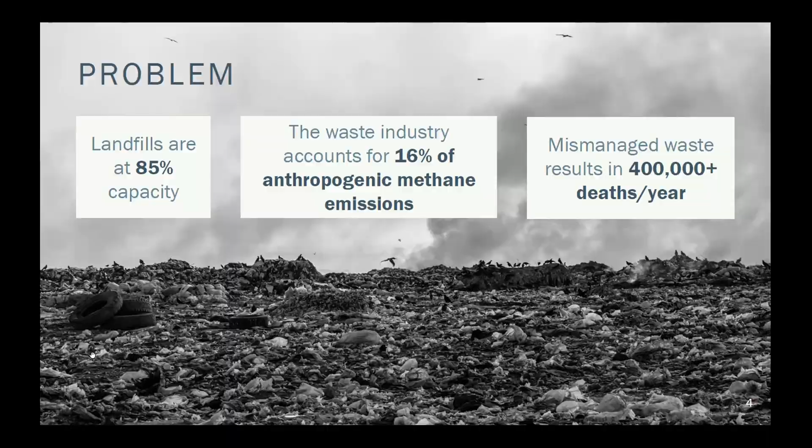So after taking the course in permaculture design and learning about fungi, I thought, why not try to apply it in an industrial waste stream like construction and demolition waste, which is also comprised of heavy hydrocarbons. So presenting the natural ecosystem that fungi would enjoy.

We're using the mycelium, the root structure of the fungi. They're natural cleaners of our earth, and they've been doing it for centuries without our help. But they're also natural builders, because the chitin that makes up the cell wall of the fungi is a naturally occurring material, and those materials are water and flame resistant, insulative, and lightweight. So it's the duality of using a nature-based solution that makes our process very efficient.

Next slide. In addition to what happens in nature and what we've seen in industry, we know there's a huge body of work around mycoremediation as a form of bioremediation across multiple chemical streams and multiple waste streams.

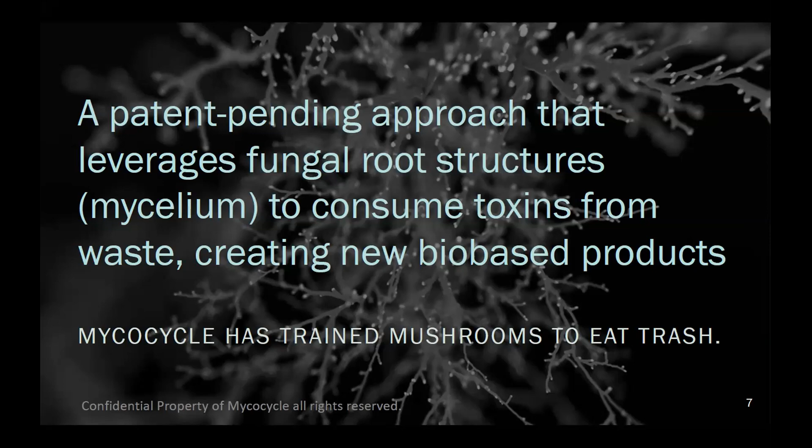So I'll tell you a little bit about how we do it. Next slide. At a very high level, we do a three-step process.

We develop all the fungal inoculant in our lab using a solid state fermentation practice, generally growing it across some type of agricultural input, which can also be a waste stream, to create our treatment. We then take that out into the field.

So we're working in situ. We could do it ex situ, or establish micro-processing sites too, where we are on the footprint of waste management. I'm really cognizant of transportation being a large part of the carbon issue, and so we want to work with a footprint that's already out there.

We take in size-reduced shingles, rubber, gypsum board, foam, polyurethanes, polypropylene textiles. We blend it in the second step with the materials and incubate it, so it sits for 4 weeks and processes in a controlled environment.

Fungi are just like us. They like to eat, drink, breathe, and be comfortable. They're most akin, by the way, to humans, of any organism on Earth. So just think about what we like, that's what they like.

At the end, we have a harvest, a MycoFIBER, MycoFILL, which is a new bio-based raw material that could go into the additive marketplace. We could actually manipulate the size of the materials and create things that could replace potentially calcium carbonate or magnesium hydroxide, going into fillers to not only replace things that we would mine that would have a high embodied carbon, but to also potentially improve the properties of the material they're going into.

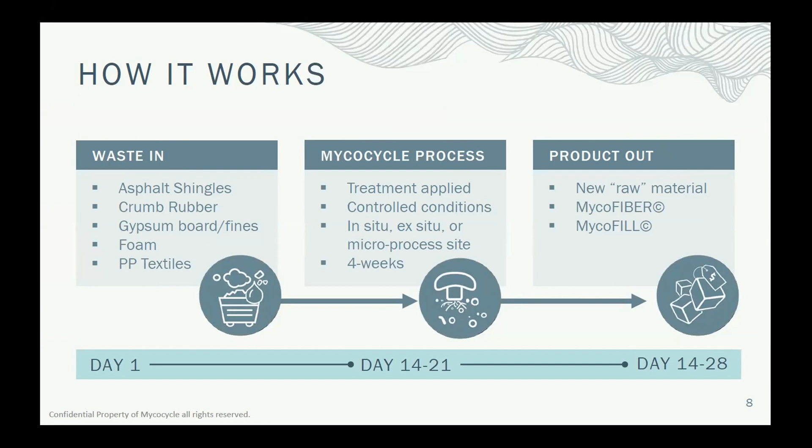So just a picture of what I described to you. Again, you see on the far left, the fungi, the entirety of that. We're used to seeing that mushroom cap. What we're really working with is the mycelium, which is that root structure below. We do lab cultivation, so steps 1, 2, and 3 happen in our lab.

Step 4 is out in the field, and this is blended, our treatment blended with gypsum drywall. This was a 4,000 pound paid pilot that we did out in the field.

Picture 5 is the field incubation. It's very passive. We did it in an intermodal container, climate controlled, spray foamed it. It was very low tech, and at the end of 30 days, you see this massive block. So if you compare from picture 4 to picture 6, this is what happens, and this is the outcome.

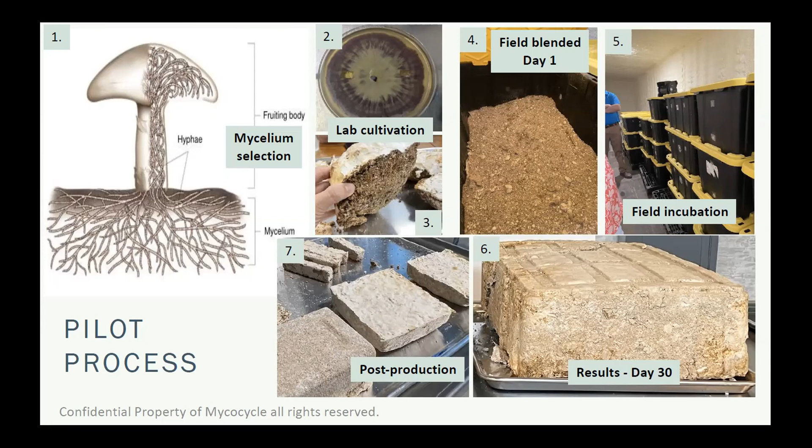Then we bring materials back to our lab where we can enter post-production or secondary incubation to meet the needs of manufacturers. Next slide.

So for obvious reasons, we see the benefit of driving circular supply chains and actually designing waste out of the supply chain within the built environment.

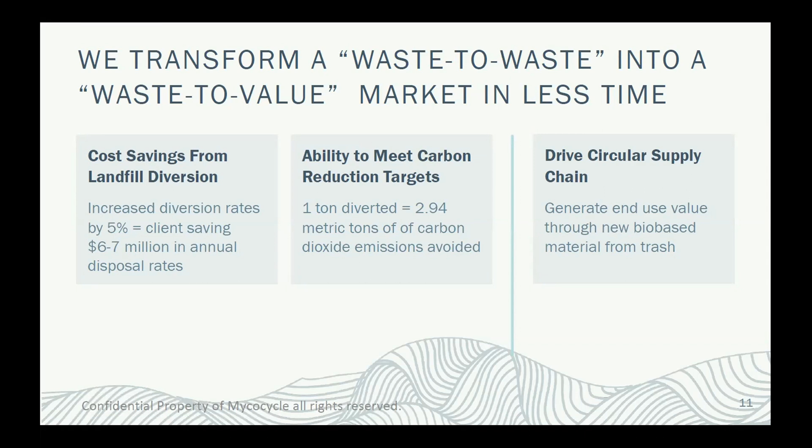We want to hit these metrics on both sides, impacting the carbon reduction on tons diverted, as well as looking at the embodied carbon of materials that impacts 11% CO2e in the built environment space. Next slide.

So to date, we've worked with multiple pilots in the field. We've scaled on over 10,000 pounds of materials since the beginning of the year across rubber, shingles, and gypsum. And we've had a very notable pilot with Lend-Lease on asphalt shingles from Fort Campbell Army Base. So we're getting very good and positive results across these really tough to tackle waste streams.

Next slide. What we see the opportunity to enter into is this bio-based raw material market from waste. So not only are we reducing the carbon to develop new materials or resource extract new material, we're harnessing it and using it for our needs.

Fungi like that, and so it gets stored in the materials, but this marketplace is already established. It's a $1.6 billion marketplace really focused on the consumer side. So we see consumer brands using it, but these are all of the areas that we see in the built environment side where there are opportunities to enter it in.

We're already seeing acoustic products in the market in Europe as well as flooring. And as opposed to some of the early entries into this through companies like Ecovative, where they were trying to create entire board stock materials, we're really looking at the additive market where we could start to make incremental steps to embody the carbon and reduce the entire carbon cycle through the supply chain.

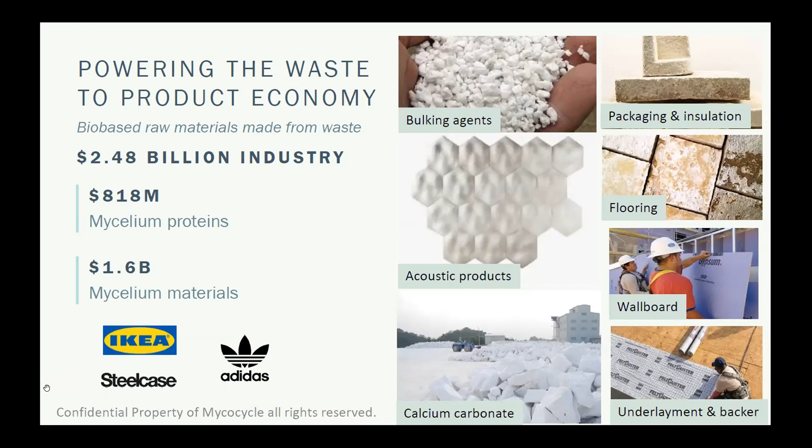So since we've started, we've gained a lot of support and recognition. I'm one of the 10 finalists for the Ray of Hope Prize through the Biomimicry Institute. We just wrapped up that cohort. Pay close attention to the folks coming through there. There are a lot of new materials that I think will be beneficial.

But what we're really looking for as we move forward are more pilot and product use opportunities, and that's the phase that we're in right now. So next slide.

I'm going to take you back to imagining a world without waste. There's no waste in nature. Nature has a tendency to take care of itself quite well, and we're the ones that usually disrupt her. So I think that it's very much kismet, if you will, that we're looking at nature to help solve our man-made issues. So I appreciate the opportunity to speak here.

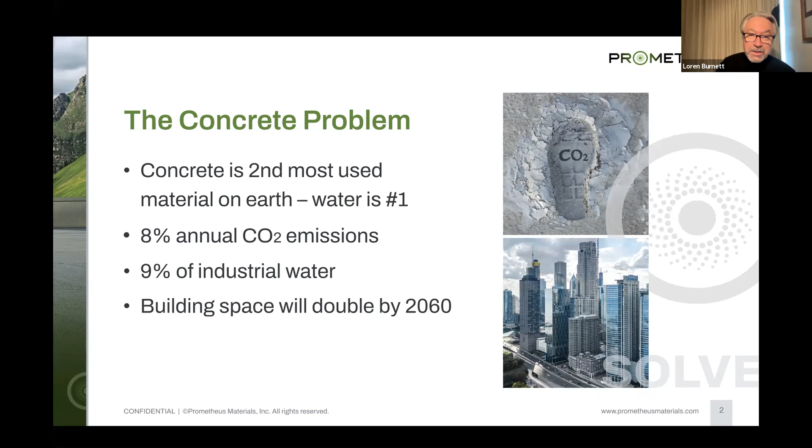But it's worse than that, because building stock is anticipated to double between now and 2060. I'm sure you've all heard this statistic, but it's the equivalent of building a new New York City every month for the next 37 years.

So our solution: we are producing an ultra low carbon alternative. We use microalgae and some other agents that we put into the mix, and we go through a process called biomineralization, which I'll talk about in a second. We then mix that with sand and water to create, in our case, bio-CMUs, concrete masonry units that are ultra low carbon.

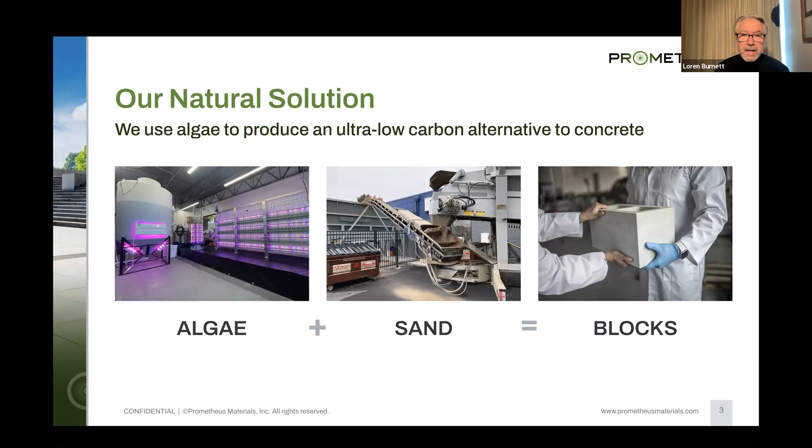Biomineralization is the key to what we do here. It's a process that nature uses all the time to build seashells and coral reefs. Basically, it's using natural processes, living materials, to create minerals, and in our case, calcium carbonate. So what we do is stimulate algae to biomineralize calcium carbonate on a commercially viable basis and time scale.

The technology started with the Department of Defense, DARPA, with 4 professors from the University of Colorado. DARPA wanted to see if there was a way to produce a hardened substance very similar to concrete, but they knew they couldn't fly it into the middle of, say, a desert — it's too heavy. They didn't want to truck it in over potentially hostile territory, so they wanted to see if they could use living materials to produce something in situ.

What the professors came up with is a process of using algae and biomineralization to create a substance very similar to concrete. With the success of that project, we formed the company back in March of 2021 with the 4 professors and myself.

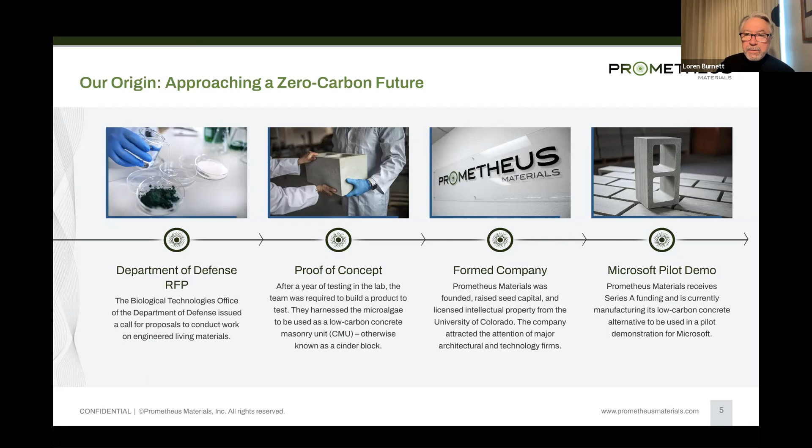We then completed a major pilot with Microsoft. Subsequent to that, we raised a Series A round of funding in March of 2022, and we began actually building a company around this technology.

Our partners in the Series A are pretty important to us because 3 of them are very focused on concrete in their businesses, and they all came to us wanting help to decarbonize the use of concrete and its downstream effects on CO2.

Microsoft's Climate Innovation Fund invested in us, and it's really the folks working with Microsoft who are building 50 to 100 data center campuses worldwide annually — so lots of concrete. GAF Roofing and their sister company BMI over in Europe together represent the largest roofing materials company in the world, with lots of concrete roofing, particularly in Europe right now.

And then Skidmore, Owings and Merrill, the architectural firm that designed the world's tallest building, the Burj Khalifa in Dubai, One World Trade Center in New York, and many others. All these companies know they are specifying the use of massive amounts of concrete and want to change the carbon footprint of what they're doing.

From a material perspective, what we have here is a very different material. The thermal conductivity of our CMUs relative to a Portland cement-based CMU shows a 90% difference in thermal conductivity, which is really exciting for us.

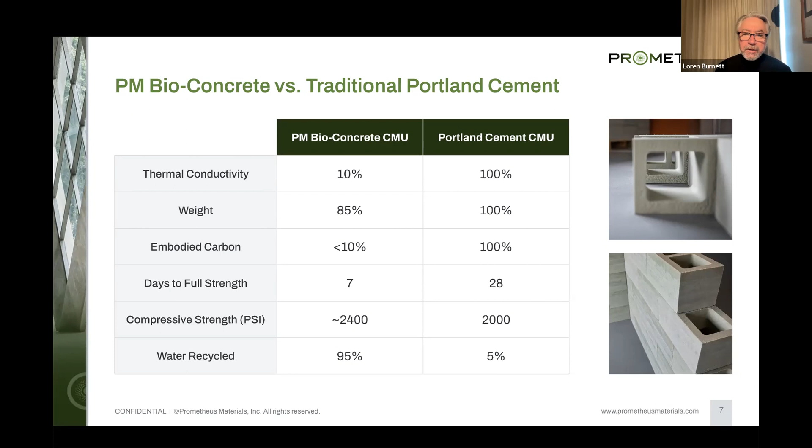From a compressive strength perspective, the ASTM minimum is 2000 for Portland cement-based CMUs. We're at about 2400 PSI for compressive strength. And actually, we've just done some internal testing on flexural strength, and we're at about 2,500 pounds per square inch on that, which is about an order of magnitude better than what you would see in normal concrete.

So our vision, our go-to-market product right now are bio CMUs. That's what we're doing right now. We're going through the ASTM testing process and certification process, which will be done this quarter. We believe that by the end of this quarter, we'll begin production of bio CMUs.

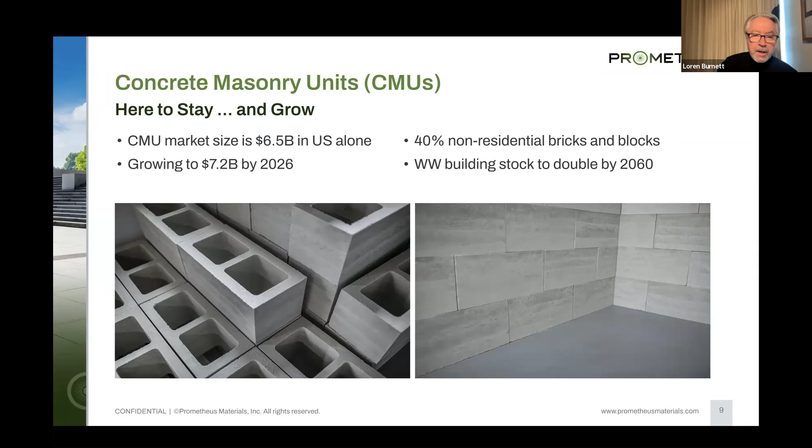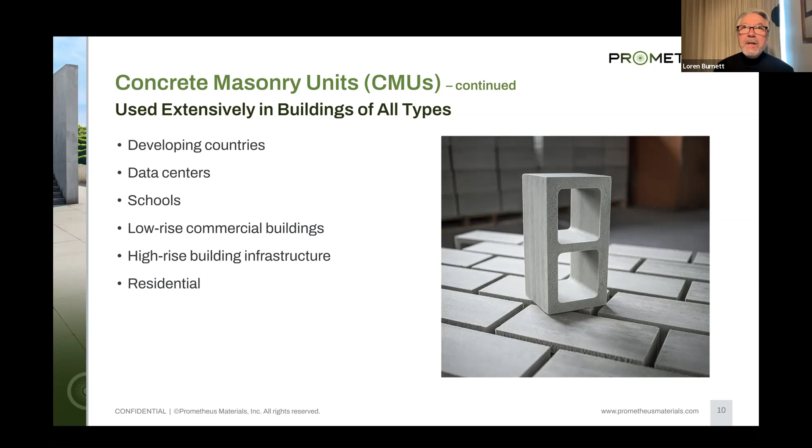Clearly, CMUs are a very significant building product throughout the world. There's hundreds of billions of CMUs made and used in building on an annual basis. And we've chosen CMUs based upon the fact that we can get to market very quickly with CMUs. We don't have to go through a 2-year testing process or something like that.

So our mission overall is to reduce carbon to the atmosphere by 1 gigaton per year. We're not going to do that by ourselves, and we're not going to do that next week or next year. But over time, we believe we have the technology to be able to do that.

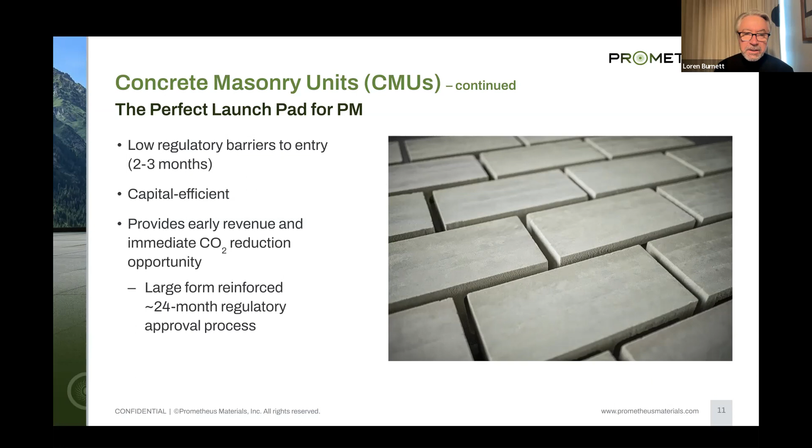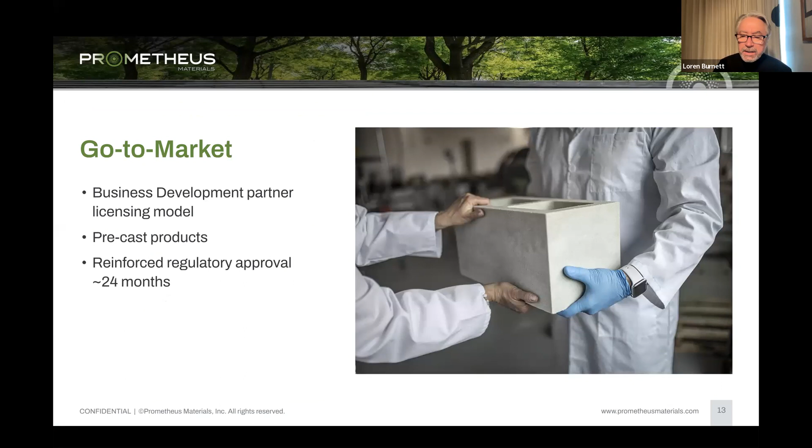Ultimately, we will begin to go through and go into other precast products, and then ultimately go into a ready mix concrete application downstream. Initially, we've already got ASTM sign off on non-load bearing CMUs, and we will be going through the testing process to get certified for load bearing CMUs again by the end of the quarter here.

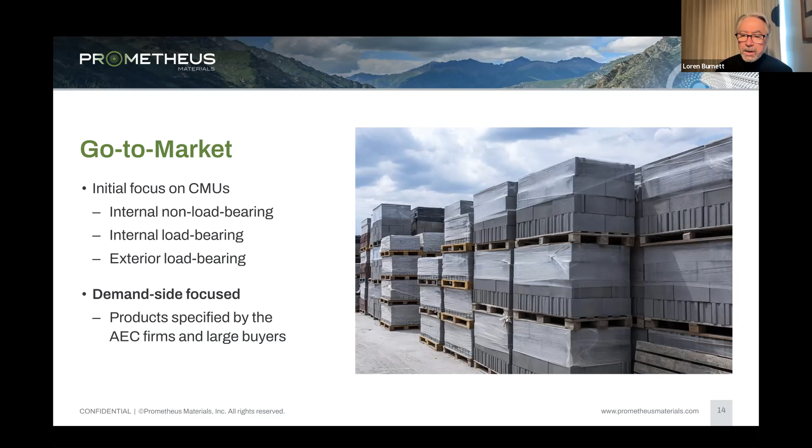Our focus also, contrary to other companies that are trying to reduce carbon in concrete, who generally focus on the supply side, working with concrete manufacturers, we take a very different approach. We work on the demand side. So we're focused on clients that specify, like Microsoft, like SOM, the use of large quantities of concrete building materials.

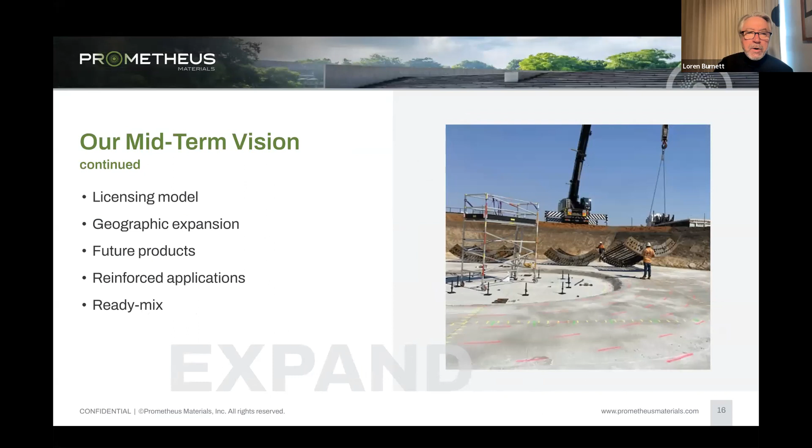And again, then moving on to precast applications, and ultimately we'll be going into a ready mix application as well. Our process overall is to license our technology. We're producing right now, or we will be, but the future is really licensing our technology to cement and concrete manufacturers worldwide, as well as manufacturers of concrete products. And then again, 1 gigaton a year.

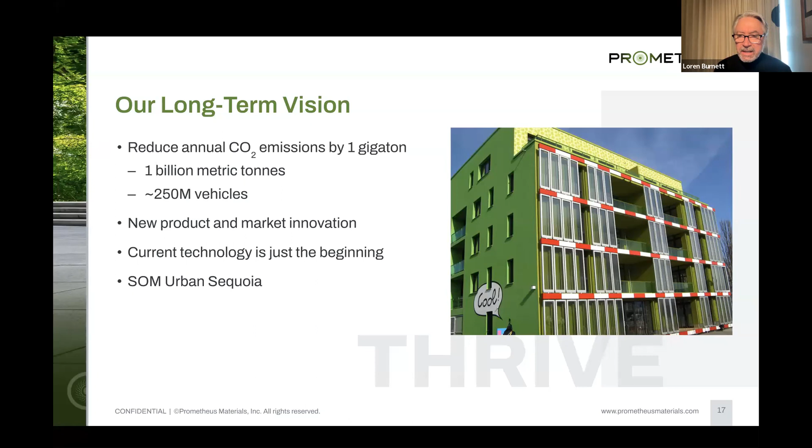I would encourage all of you to take a look at SOM's website and go into Urban Sequoia. It's fascinating what they plan to do with buildings, and they look at Prometheus Materials as a key component of their Urban Sequoia strategy. Lots of press over the last several months. This area is hot and getting hotter, and we're very excited about our opportunity to work with companies, as well as folks like yourselves, to reduce embodied carbon.

So thank you very much.

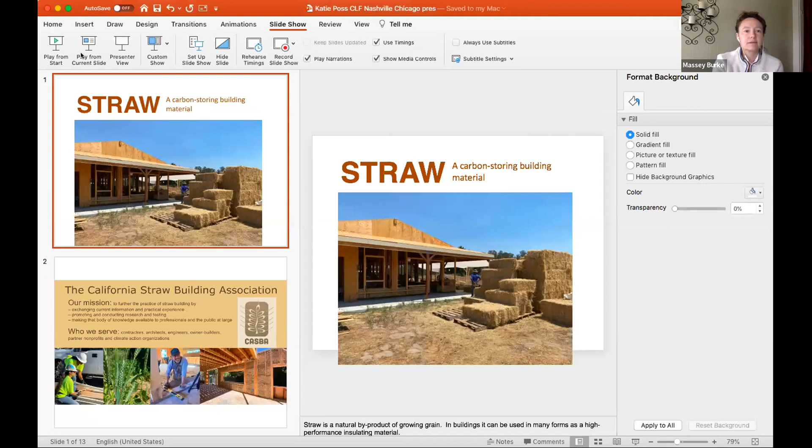Hi, everyone. My name is Massey Burke, and I'm the co-director of the California Straw Building Association. And I'm going to talk a bit about not a product, but a community.

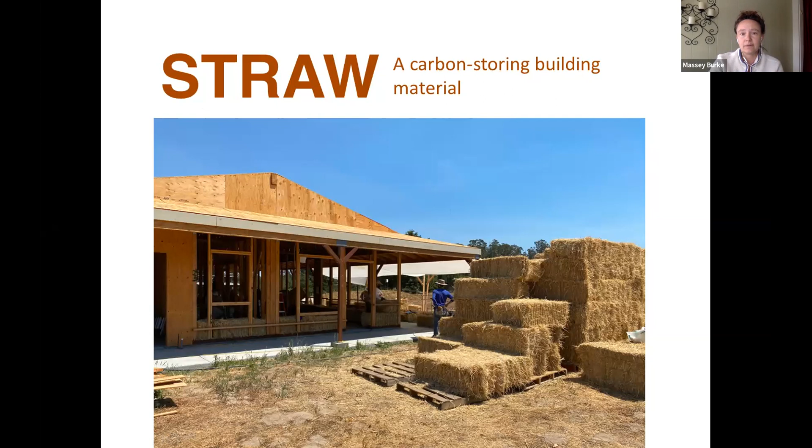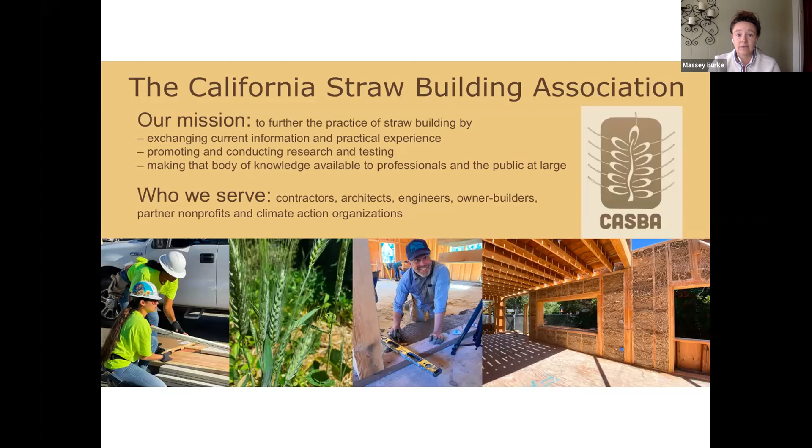So building with straw is what I would currently call an open source, mostly a nonprofit building community made up of, I'll keep going, here we go, California Straw Building Association, a trade organization, nonprofits, made up of architects, engineers, contractors, DIY, all practicing and helping to scale various ways to use straw as a building material.

Some of the stuff we're working on right now: working on an LCA for straw. These exist, there are a couple of European ones. We don't currently have an American LCA for straw, and then straw-based products, which I'll talk more about in a minute. Working on scaling up the workforce skills for building with straw and other natural materials.

Working on supply chains, also looking at land management and supply chains and what impact that has. Working on code and testing. California Straw Building Association was responsible for writing the international straw building code that currently exists in the residential code, and we do ongoing code work in various ways. Professional education, more training resources, online trainings, and working on issues like insurance, helping other parts of the sector become familiar with and comfortable with straw as a building material.

Okay, so straw anatomy 101. This is something you're probably familiar with, but straw is the stalk of one of the most common grain-growing grasses, cereal producing grasses. So typically in California we build a lot with rice straw, but you can build with wheat straw, oat straw, or barley straw. What's important is that straw is what's left over when you harvest the seed off the top of the plant.

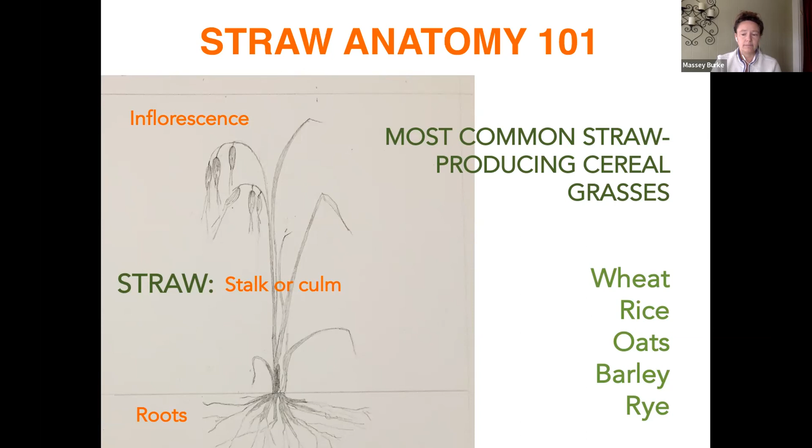Couple notes on sourcing and growing straw. We currently talk about straw as a byproduct or waste product. I'm taking a both-and approach to thinking about straw supply chains right now, but as you're probably aware, land management processes are becoming more and more important when considering the carbon footprint of building materials. So one thing I like to work on is thinking ahead about how to support climate-smart or regenerative land management processes as much as possible.

One reason we have a lot of straw available right now is that straw-producing plants are grown as a monoculture, which means it can be hard for that cropland to reabsorb all of the straw into the soil in the planting cycles typically used. So especially with rice in California, but also large-scale wheat growing and other crops, you just have a lot of leftover straw stalks, a lot of which gets used for animal bedding or erosion control, but there's still a good bit left over from that.

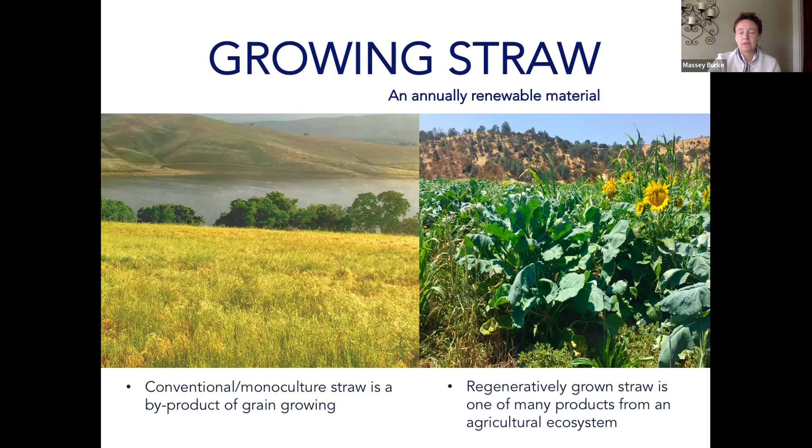In a more climate-smart or regenerative farming process, there's not really any such thing as a waste product. Any biomass is going to be fed back into the soil. So if you're trying to produce an annual plant like straw in a way that's climate smart, it's purpose-grown in a sense — you're always designing for what biomass is coming into and going out of your system. It's something I find very interesting to be aware of as we continue to improve our climate impact as materials.

Quick note on straw production and soil health. You can design straw production into a farming practice that employs good soil management, which really just means helping soil microbiome diversity, allowing the farming system to store carbon in the soil. So we have this 2-for-1 benefit of straw and other plants: if your sourcing is climate-aware, you can store carbon both in the soil as part of growing straw, and in the building as part of using that produced plant carbon in a place like a building's wall, where it won't break down.

This is kind of fun.

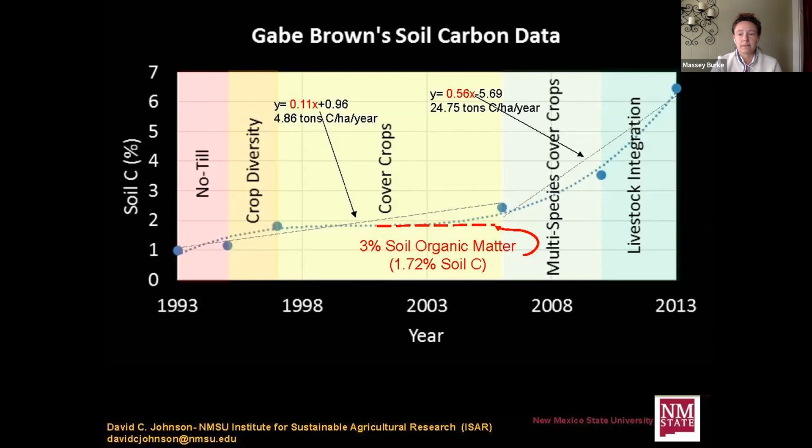Okay, so how to build with straw. Typically straw is currently site built and usually pretty simple. One of the advantages of straw as a building material is that you don't have to do a whole lot to it. You can harvest it, it needs to be below 20% moisture content, bale it up, and essentially stack the bales in the wall.

Bales can be integrated with framing. They can be load bearing, though you end up with more design limitations when you build with straw that way. The bales can be modified in various ways to accommodate different types of frames, but are simple to field modify, usually cut with a chainsaw, or sometimes custom bale cutting tools, stacked with a crew or with a community.

There's a related technique called light straw clay, where you can form a straw wall in a frame, again site built. Both of these techniques have ancient roots in European timber frame building and other types of infill building. So this is really just the modern form of a traditional technique.

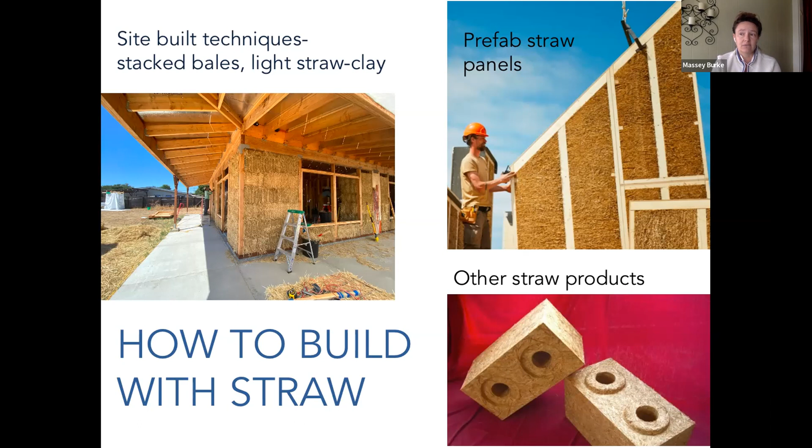We are starting to see prefab straw panels. The picture on the right is a company called EcoCocoon, and other panelized straw systems are starting to come into existence. There are various other types of straw products too. On the lower right is a product called Stack Block, which is in development - compressed straw blocks. There's MDF board being developed out of straw, and other things beginning. I'd say we're a very incipient field for developing straw-based building materials, and we have this really robust open source community that can act as the foundation for more product development.

What straw usually looks like finished is a plaster. You can finish straw conventionally with sheetrock, but it's currently more typical to do a lime or clay plaster on the interior - lime, sometimes clay, often conventional siding on the exterior.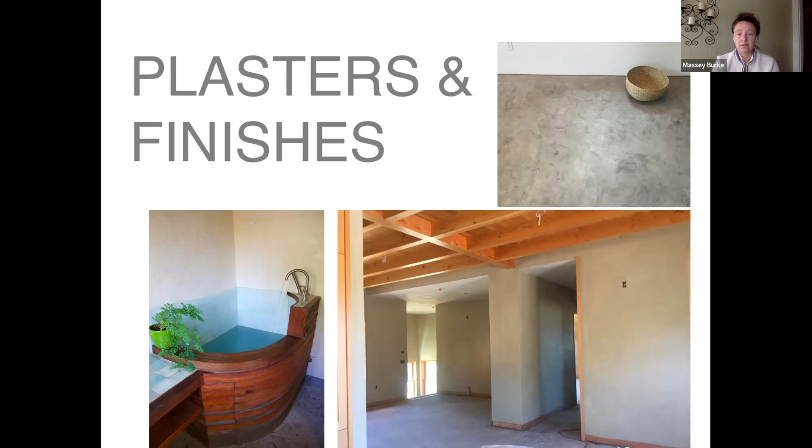So we're working on one that's going to be more conventional framing thickness, a 5.5 inch thick panel. It's essentially a SIPS panel, but we're modifying the straw just enough to increase the R value per inch, which allows us to make a fairly thin, fairly light, straw insulated panel that's carbon storing.

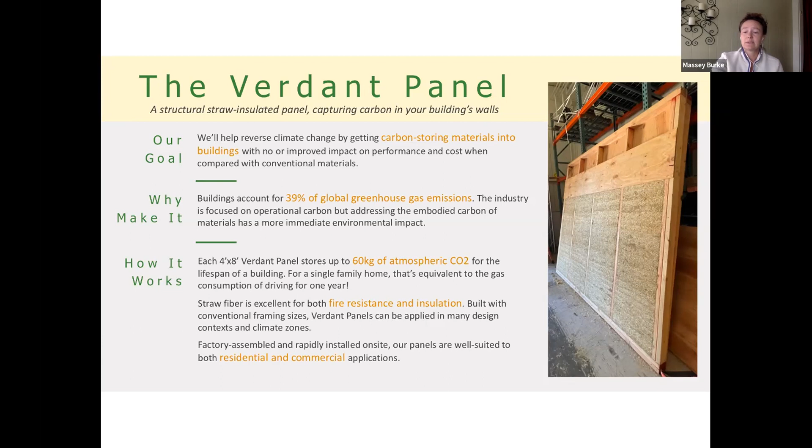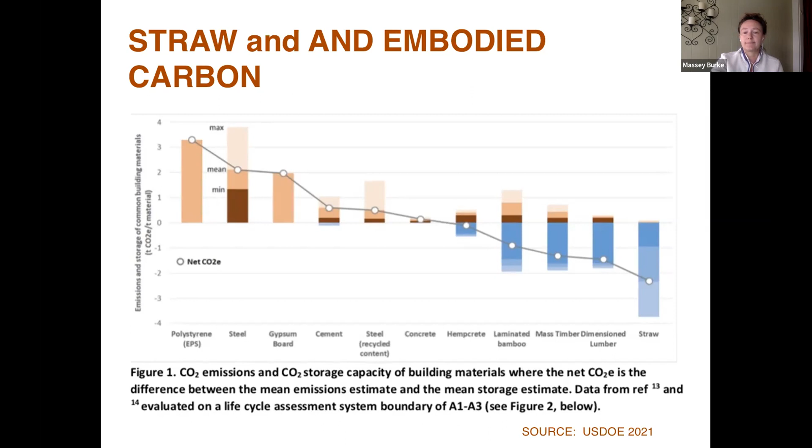Some comparisons from modeling that a colleague of mine did - a typical 1,200 square foot house, modeled for Vermont, looking at embodied and operational carbon to 2050. A typical 1,200 square foot house with conventional materials, reasonably but not particularly operationally efficient, would emit about 84 tons. An energy efficient version built with natural materials such as straw is going to sequester close to 9 tons of CO2.

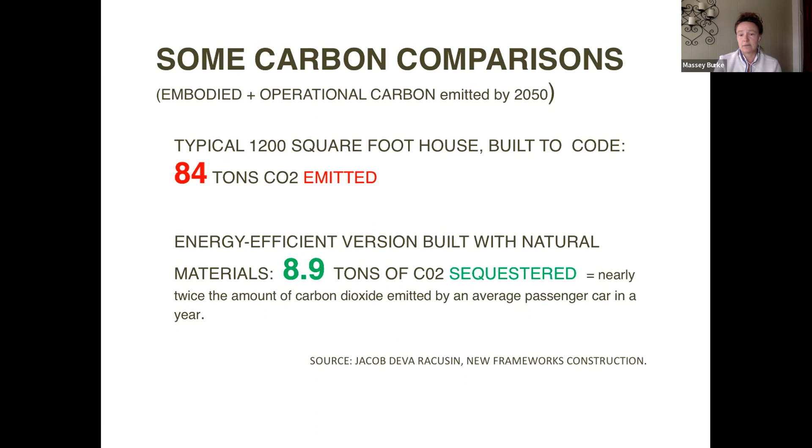And then just things that we need to do for carbon and straw, as I mentioned, working on a straw LCA EPD. I'm kind of in the middle of this, working with Katie, and we're working on questions of whether we need to create a new PCR. So really in the weeds with that.

Partnering with other organizations who work with biogenic materials for the LCA EPD process. Working on including data that we currently have into databases, and again, studying supply chains. Thank you, that's it for me.

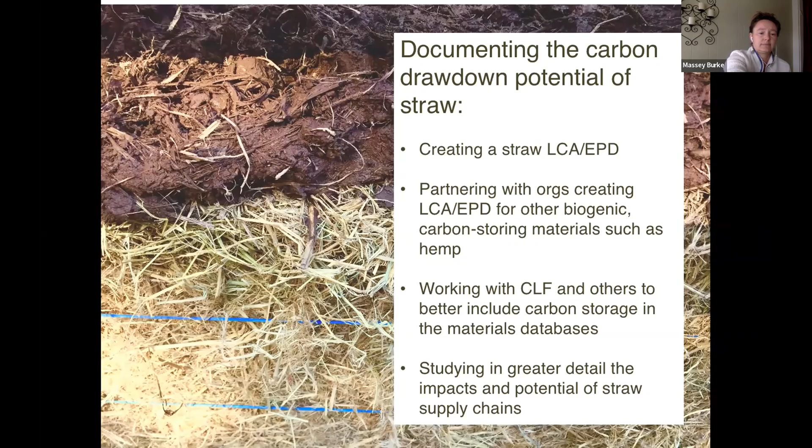My name is Anastasiya Konopitskaya, and I'm a CEO and co-founder of Coexist. At Coexist, we design with regenerative materials and we manufacture those regenerative materials. So I'll start by why it is that we do this.

The UN published a report, they do this I think every year or so, and they stated that a city the size of New York City is pretty much built once a month across the world, and it's going to continue so for the next 40 years. While we can't stop this kind of massive construction, if we make a change in how those buildings are built, collectively, we can create a huge impact on our environment.

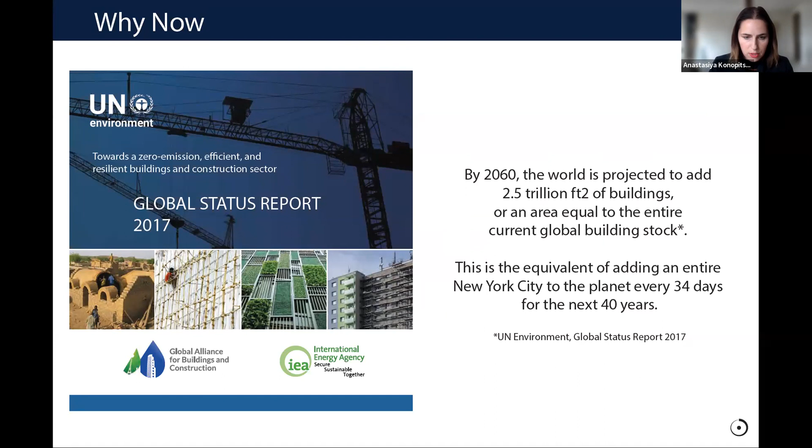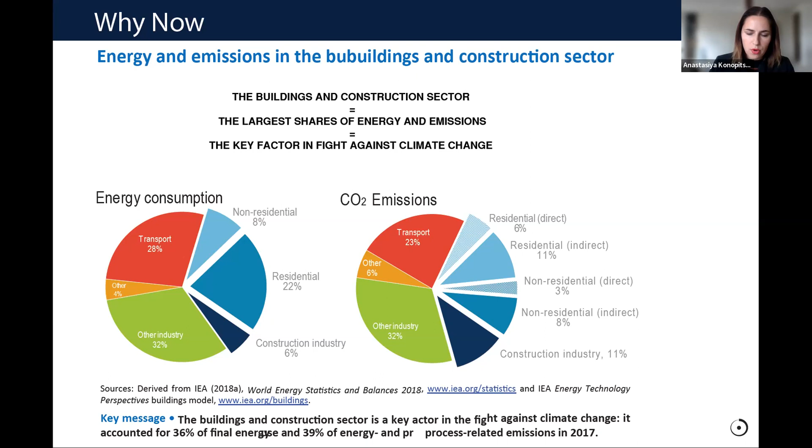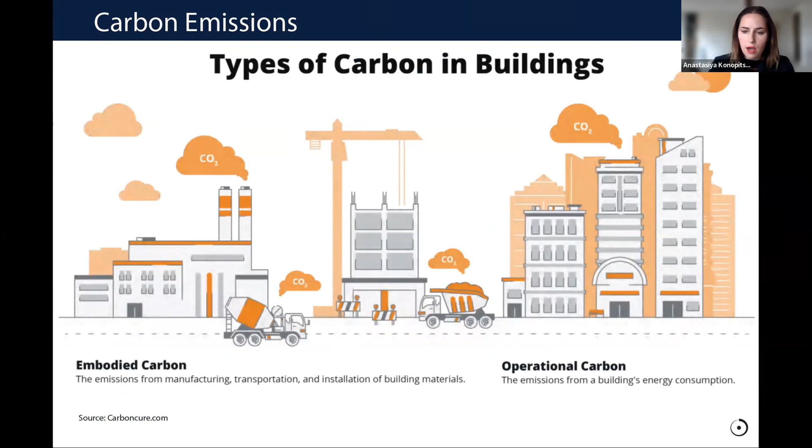Why is it important? Because the construction industry is responsible for huge amounts of energy consumption and emissions, about 40% compared to other sectors. And when we talk about carbon emissions, we're talking about embodied carbon and operational carbon. Embodied is something that happens during the construction of a building, and operational is during the life cycle of a building to maintain it at the optimum levels.

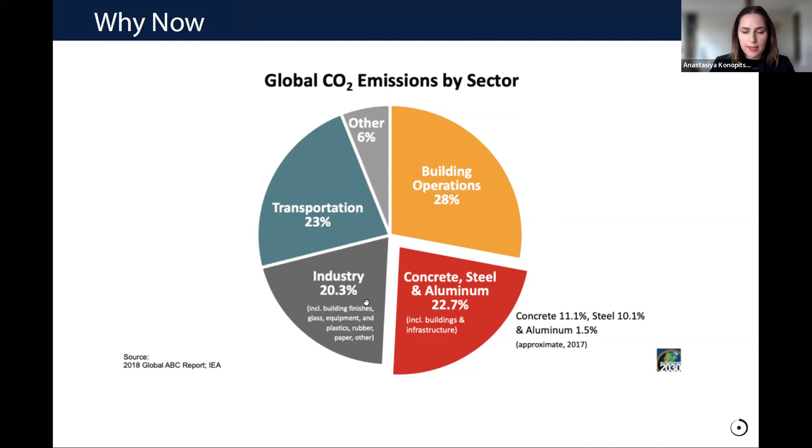This is a diagram that shows concrete, steel, and aluminum. We all heard about these numbers in building operations, but what I find interesting is that not many people look at this number here, which also includes building finishes, glass, equipment, plastics, rubber, and paper that also goes into buildings. So while the number usually circulating is 40%, it may actually be over 50% of CO2 emissions that the building industry as a sector contributes to global warming and the atmosphere.

So if we want to tackle this problem, we have two ways to do this. One is we lower the embodied energy, which is the energy you need to build a building. And two, we make buildings efficient so that we lower the operational energy of those buildings.

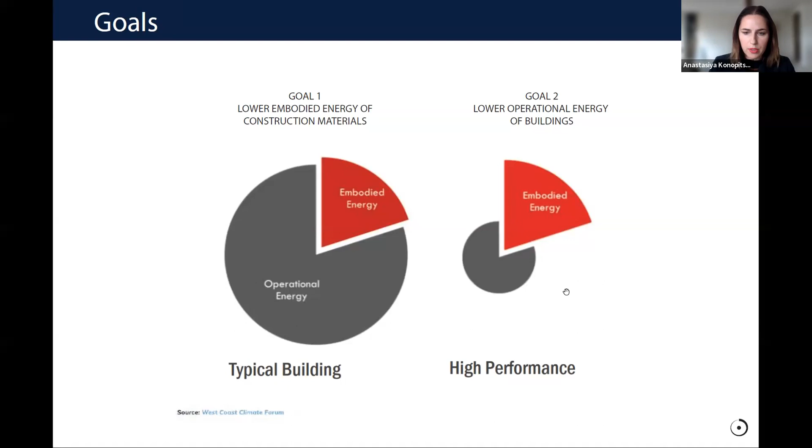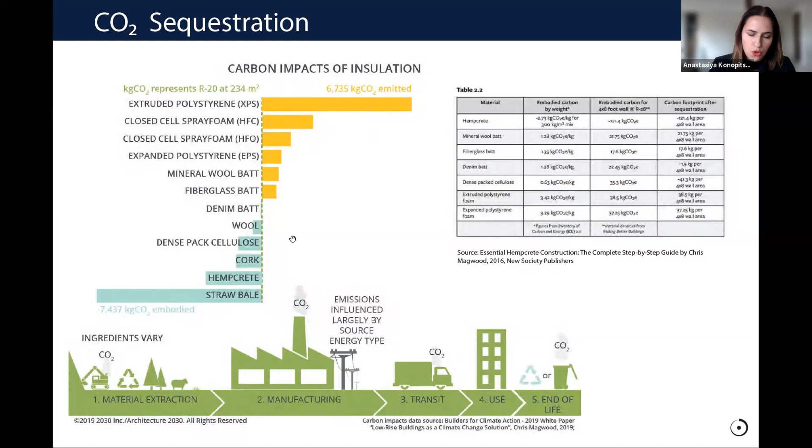If we look at an example of materials in the building envelope, such as insulation, we see that petrochemical products like polystyrene or spray foam are the worst offenders. Batt insulation is not so bad, but still not that great. Then you have natural materials, with straw bale being the best, and it seems like nothing can beat the straw bale. But this presentation is about hempcrete, that's something we specialize in, which also shows really nice numbers of carbon sequestration.

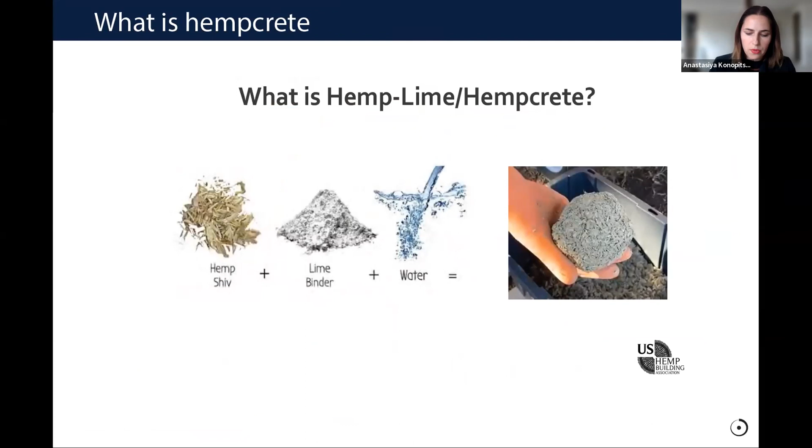So what exactly is hempcrete, or hemp lime as some people say? Basically it's made out of the woody stalk of the hemp plant, a lime-based binder - lime being one of the most naturally occurring, most available nutrient minerals out there - and water.

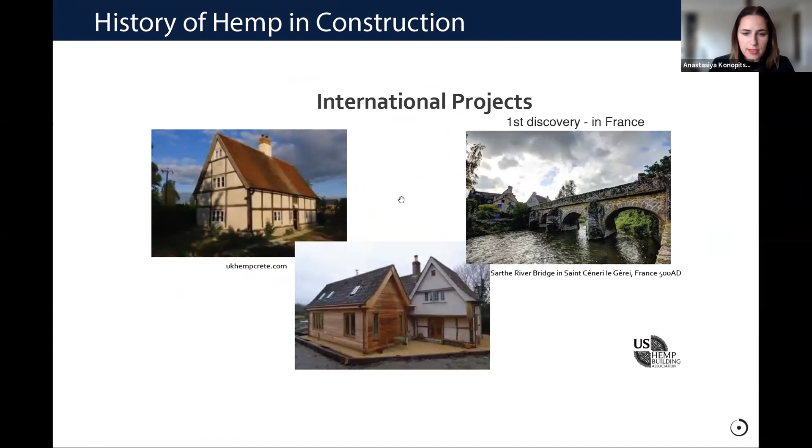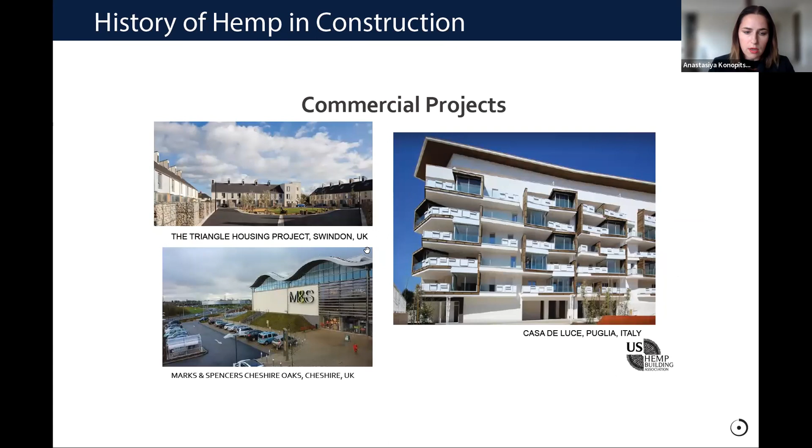There's nothing new about this material. It actually goes back to the 6th century, found in France. It was found in the 7th century in Japan. Then it was kind of rediscovered or republicized in France about 40 years ago, and since then it became a very popular product across Europe, between Italy and Ireland. And now it's picking up speed in the US.

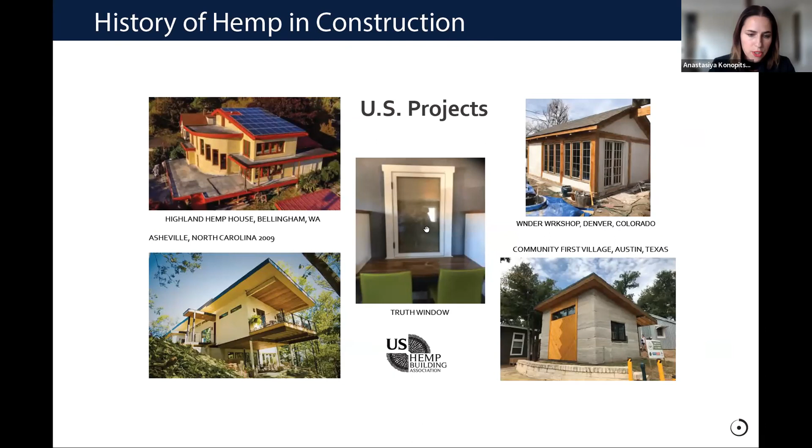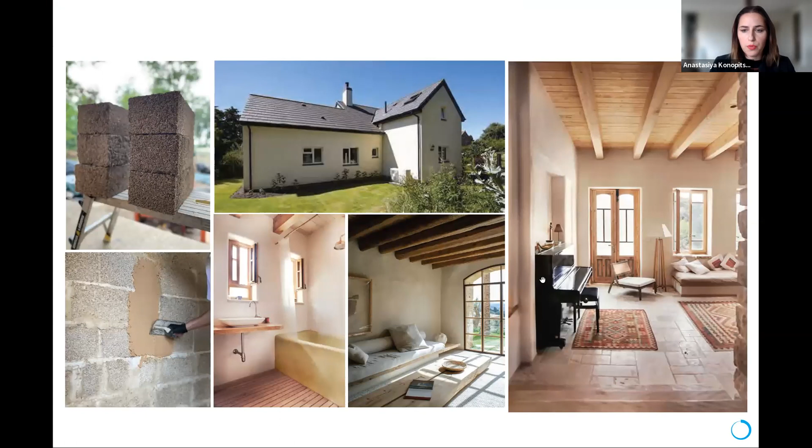These are some of the older projects. There are a lot of projects now going on that haven't been published, let's say. And this is what it looks like on the inside. So basically, in these walls there are three products: a structure, usually wood structure, hempcrete - which could be block or a different kind of application - and a plaster on both sides. It actually looks really beautiful, not to mention the other benefits of the product.

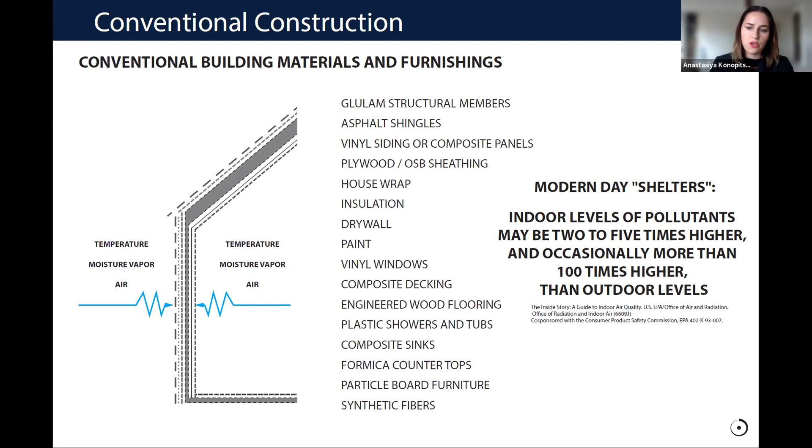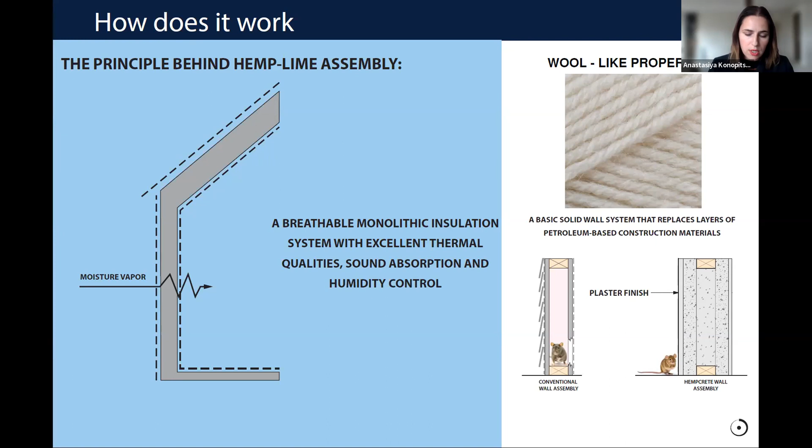It is a breathable system that allows the passing of moisture vapor because this material dries out, but it emits this moisture in the driest area of the house, wherever you need it.

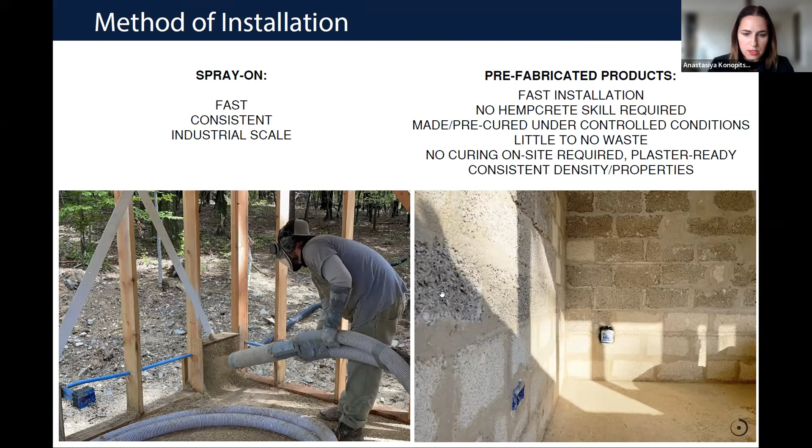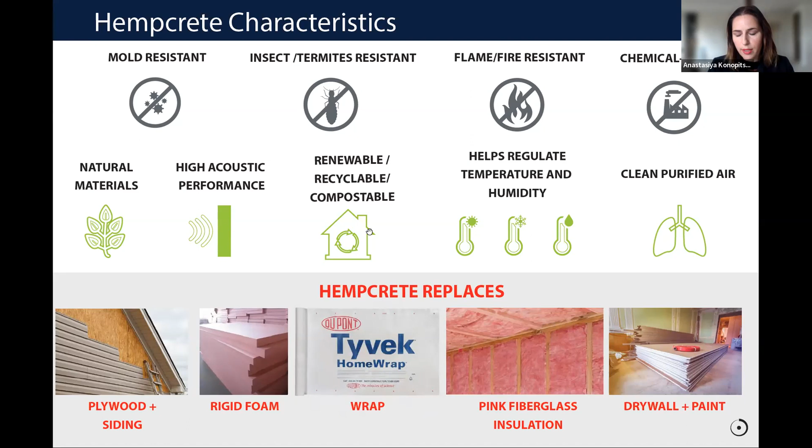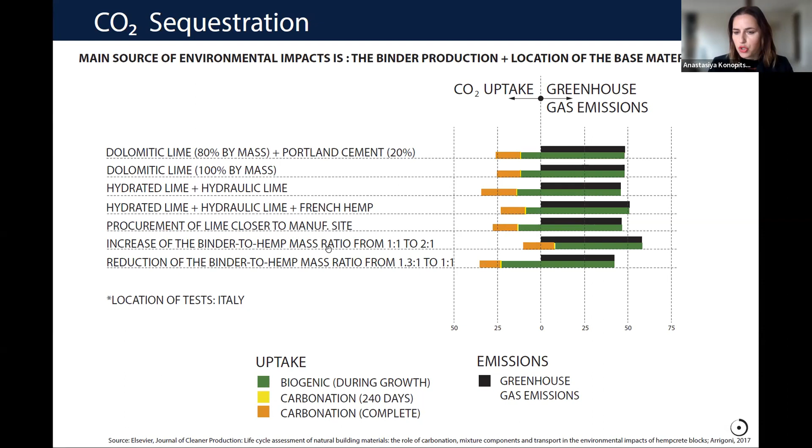This research was done on carbon sequestration. I won't go into details, but they studied the transportation distance for hemp and binder to the manufacturing facility. In this diagram, the black lines show greenhouse gas emissions, while green, orange, and yellow show carbon sequestration. It shows that within limits, if the field is, say, 2 hours away from the factory, hempcrete production still sequesters more than the machinery emits into the atmosphere.

People usually ask, what about all that equipment, like tractors in the field or the factory running full speed? Wouldn't that raise the carbon footprint and make it carbon positive? No, the research shows that even with all the equipment involved, making the blocks at a factory still produces a carbon negative product.

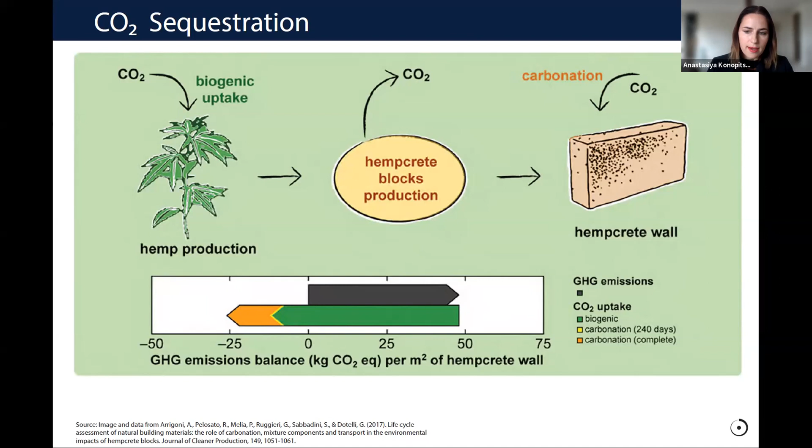So how does it do that? It sequesters carbon, most of it during the growth cycle of hemp, which is very short, 3 to 4 months. The rest of the sequestration happens during the carbonation process. Once installed in the house, that process could take up to 200 years, during which it basically turns into limestone, and by sequestering carbon out of the atmosphere while it's curing, it purifies our air as well.

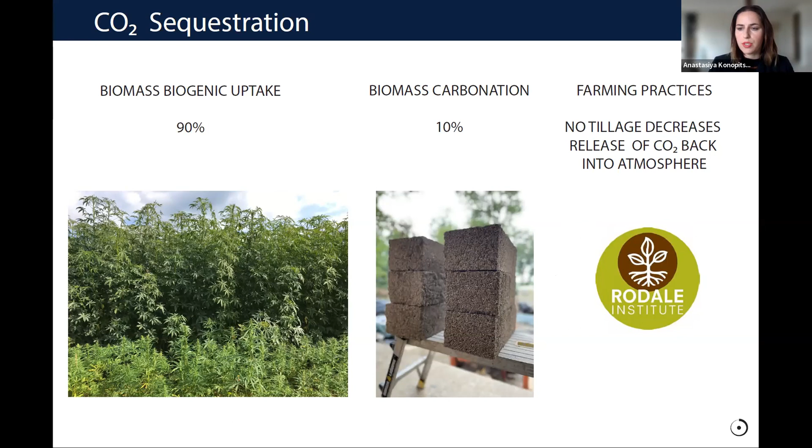Someone mentioned farming practices before me. We work with the Rodale Institute and follow closely their research in farming practices, they actually pioneered the word organic. They're pretty far advanced in their research, and the no-till practices they advocate in regenerative farming also reduce CO2 emissions back into the atmosphere.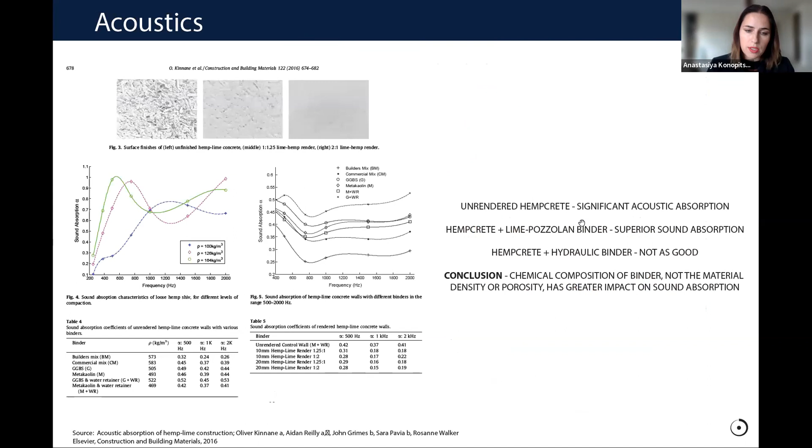One of the most important things to mention is that, even though it's a new product, it was just accepted into the International Residential Building Code. It will be adopted in the 2024 version, which is great news for all of us.

Coexist actually co-signed the application. This is great news because it will also pave the way for having it approved for commercial building code. And in conjunction with that, heavy timber was also approved to replace steel structures in buildings, which will further reduce carbon emissions in our buildings.

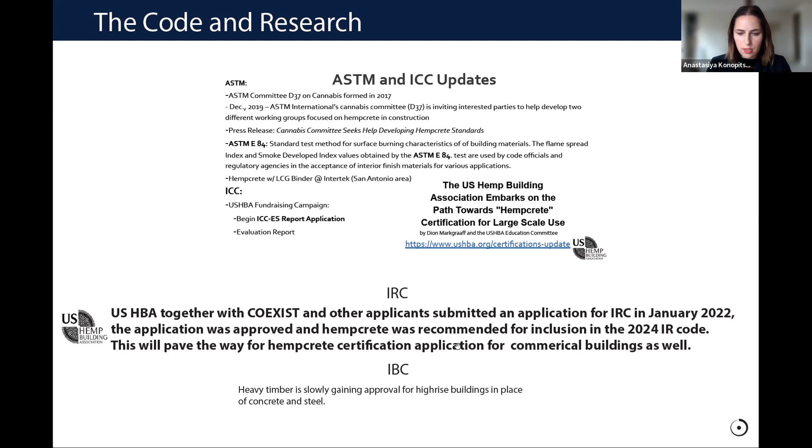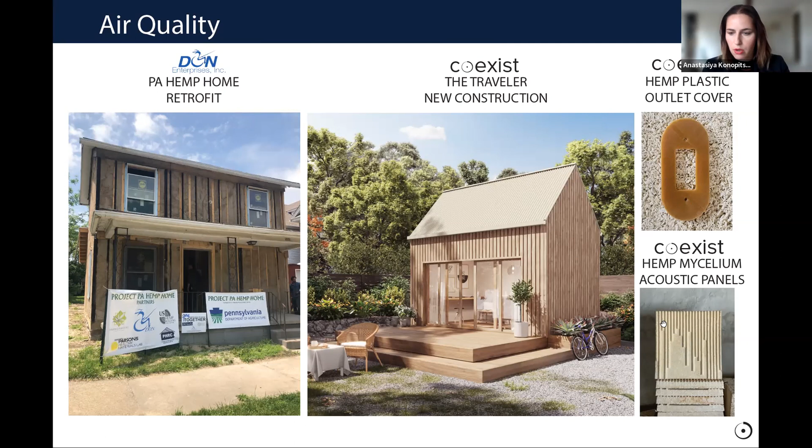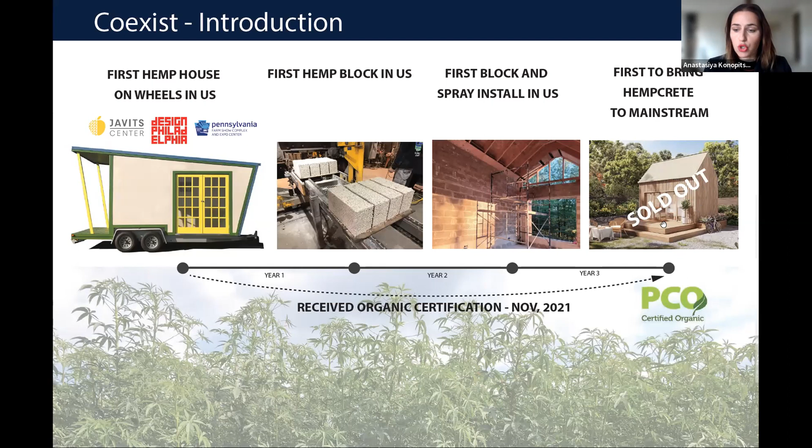Just a little bit about ourselves: we started out making a little demo unit on wheels that we took across Eastern US, including Javits Center in New York City. We're the first and only company right now to manufacture blocks at a factory. We've done all kinds of testing on the blocks in real life projects, including one in Hudson Valley, New York, where hempcrete was sprayed against it. Then, to take it into the mainstream, we created these kits that sold out within the first six months.

Thank you so much, Anna, and everyone else. These are awesome presentations. I really liked seeing the connection between embodied carbon savings—not just savings, but real transformation of how we build—and the intersection between that and the health and wellness of the inhabitants of these buildings, and also the beauty and design you're finding in these materials. It's always great to see that connection across all of your products.

I think we have about five minutes left. There are a couple questions in the chat. I saw a question about the R value range of straw and where that could be used in different climates, and also about the location of that house in Pennsylvania. Maybe just bring those together: how have you all been working, since we're located all over the US and worldwide—I saw some of Joanne's other locations—how are you bringing together your native and local materials where you're at, and scaling up to go nationwide?